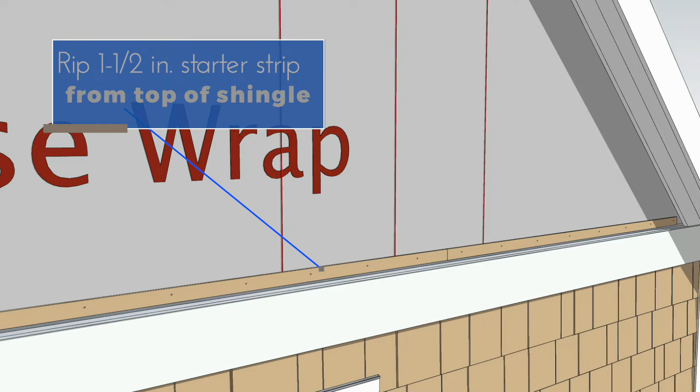Make sure the WRB is correctly overlapping any horizontal flashing and install a starter strip. Rip from the top of full panels. Make sure the starter strip is 1/4 inch above any flashing and nailed every 8 inches with siding nails.

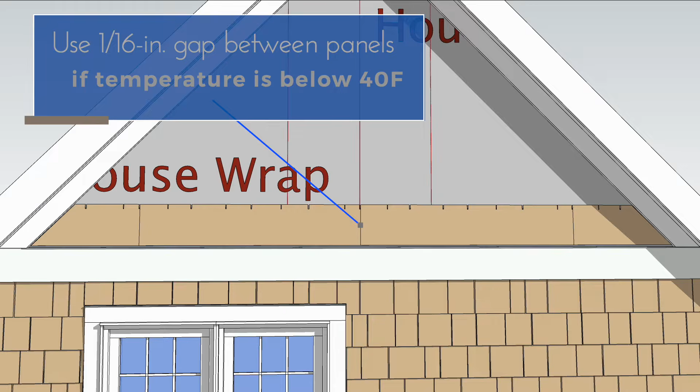Next, install a 9-inch starter course, ripped from the top of full panels. Begin on the center line and the bottom aligned with the starter strip. Fill the bottom with this starter course. Keep a 1/16 of an inch gap between panels when installing in weather colder than 40 degrees Fahrenheit. If caulking the edge, leave the appropriate gap specified by the caulk manufacturer.

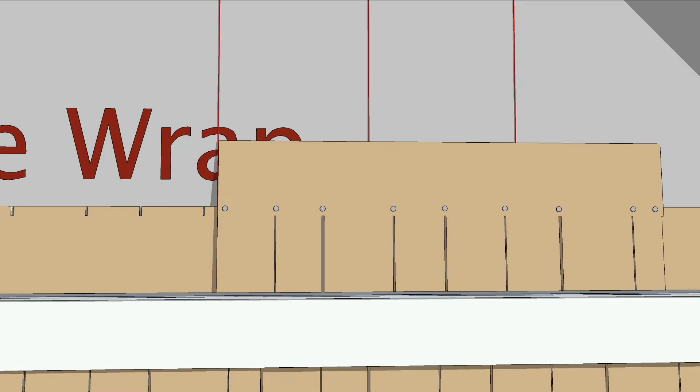The first course can be installed beginning the layout on the left vertical line and again with the bottom aligned with the starters. Nail the panel with siding nails about 1 inch in from each end and 1/2 inch above each keyway. The bottom tabs will be tacked tight with either 1 or 2 finish nails. Fill in the bottom course with the appropriate gap at the ends.

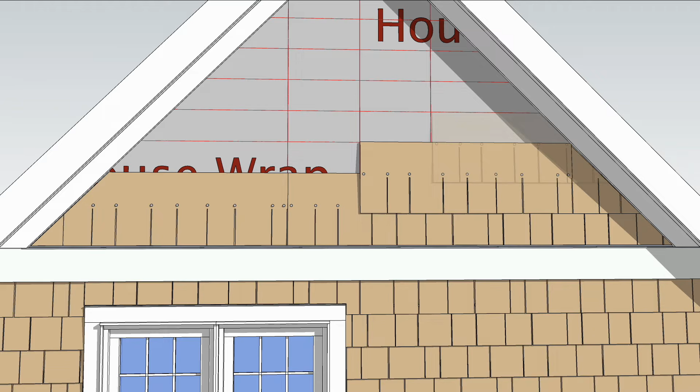Snap horizontal lines every 7 inches if using straight shingles and every 6 inches if using staggered edge shingles. Begin the second row on the center vertical line with the top on the first horizontal line. The third row staggers up and over the next lines. Fill in the second and third rows and go back to the left vertical line for course 4.

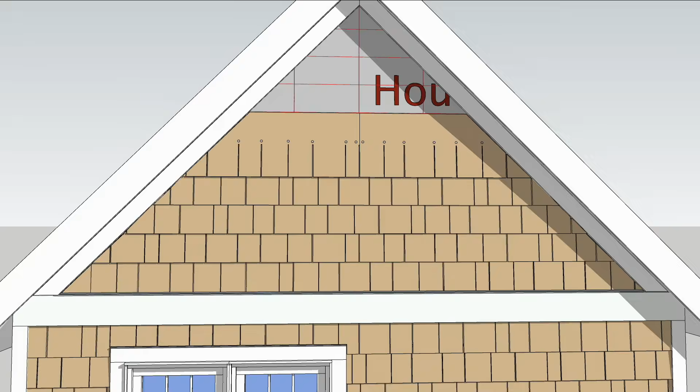Continue up the wall to the top using leftover cutoffs to fill in the small pieces and then tack all the tabs with the finish nail. If you don't want to nail the tabs with finish nails, you can use fill and flex adhesive caulk on the backs during installation. And that's how you cover a gable wall with AZEK straight or staggered edge shingles.